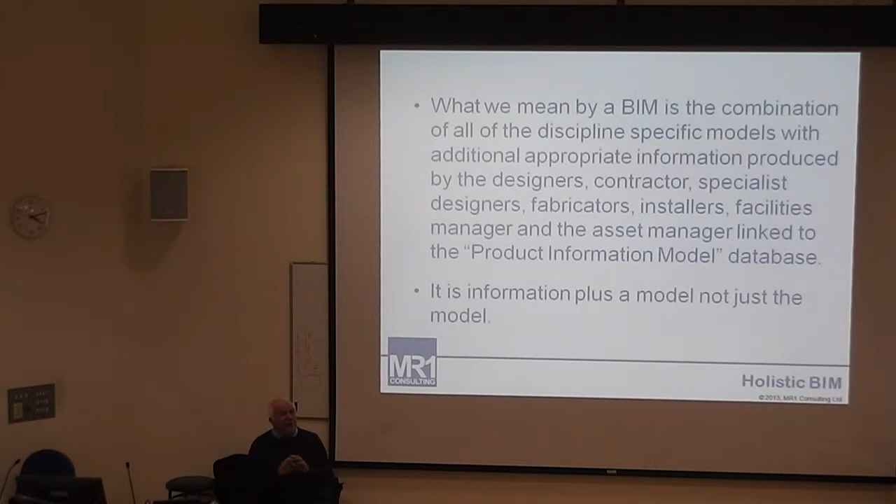If you have it all in one single model, the speed at which you can work, and I have seen people sit there and just click and digitize on the screen and go and get a cup of coffee and come back. You have to manage this process, you have to manage the data, and you have to construct the data in such a way that the tools that you have available to you will work at the optimum speed. And that's what a lot of the stuff I'm going to be talking about leads us towards.

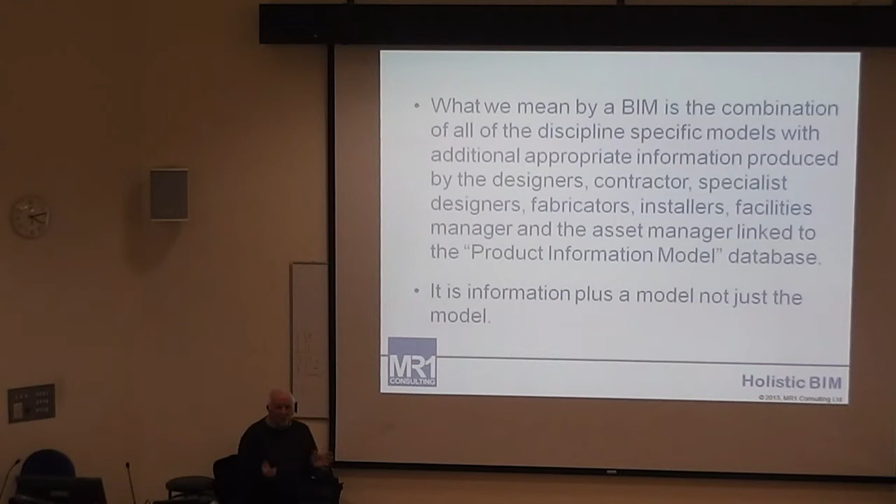Okay, the second biggest problem is an understanding of one of the biggest problems that we've had in construction forever. It really goes back, and the first reference to this is 1905 by the Royal Institution of Chartered Surveyors in one of their annual general meetings, where somebody reported that all information invariably from the architect is inaccurate, incomplete, and ambiguous. And that causes waste.

Waste in construction cost and time overruns, and they are normal, and nothing has changed since 1976 or with the advent of accurate CAD tools. I've actually taken you back to 1905. Between 1905 and 1976, everybody knew this was a problem, but nobody did anything about it. Certainly the two wars, 1914-18 and then the Second World War, the Ministry of Works actually looked and studied this problem of waste, because obviously coming out of the war years, they needed to make sure they built things once and not 1.5 times or 1.3 times, as the case is at the moment.

But because of the tools that they had to work with, they couldn't really do too much until we got to around about 1976. The tools that we were using, I mentioned drawing tools, ink, and we were drawing on linen. This is linen with a wax oil coating. That's pretty hard. Lovely stuff to work with, but you had one big problem, and that is, as you drew the lines in ink, they had to dry. And I'm a lot older than I look.

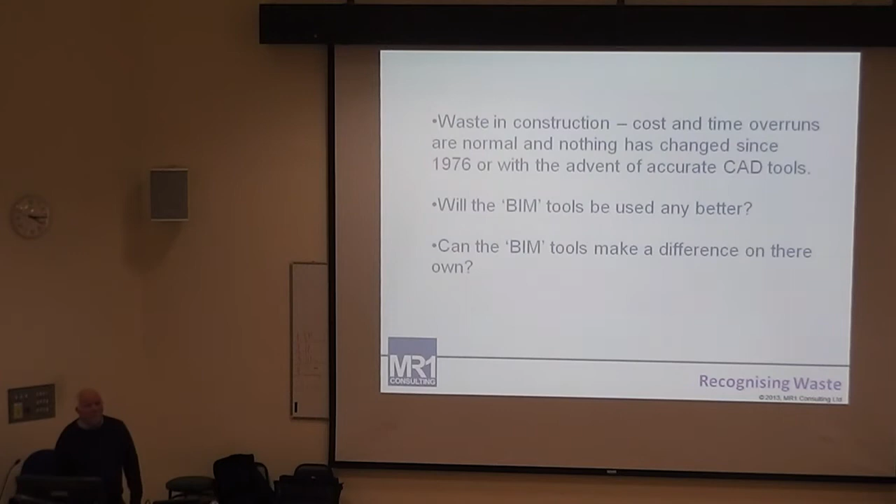So the question now is, can the BIM tools make a difference on their own? And the answer up to now is no. They make no difference whatsoever, because people are still using those tools in the same old processes that they always did, that produced incomplete, inaccurate and ambiguous information.

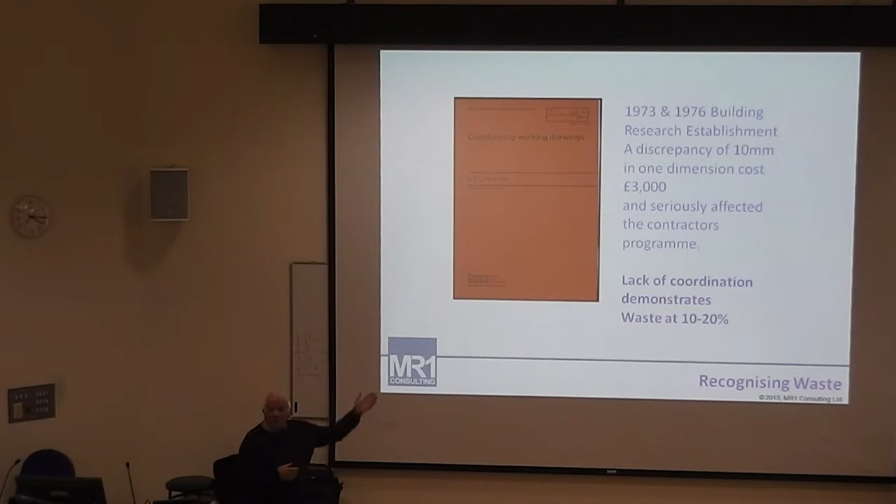1973-76, what really started this whole thing was a report by the BRE. There were two documents produced out at Garston, at their offices in the Building Research Establishment there, where they were putting up 40 buildings post-war, and what they decided to do was to go through the whole process of the design process, fabrication, manufacturing and construction process to see what errors there were and why they occurred. And all of those errors were put together and into these two reports.

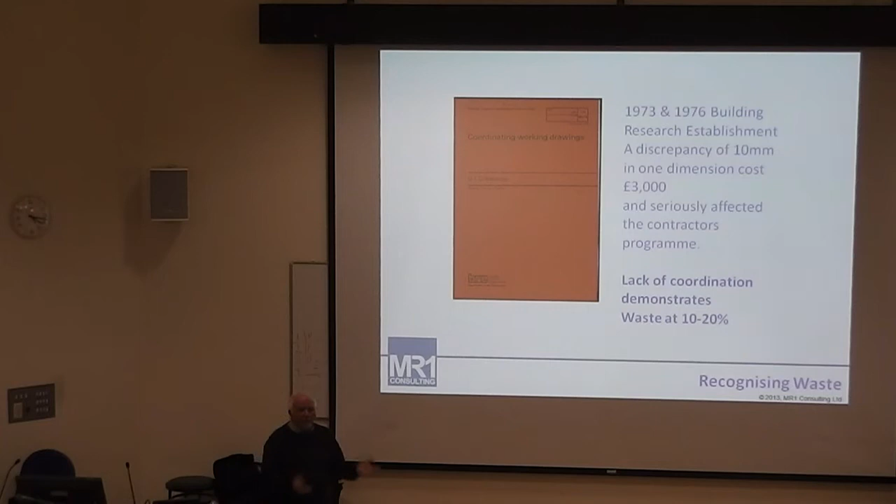The main thrust at that time was spatial coordination of information. What that means is, would things fit when you got onto the building site? And the answer was 25 to 30% of the time they didn't. And so you had to make a change on the site. Ambiguous information then comes into play after that, because everything that's attached to that bit of information is now wrong.

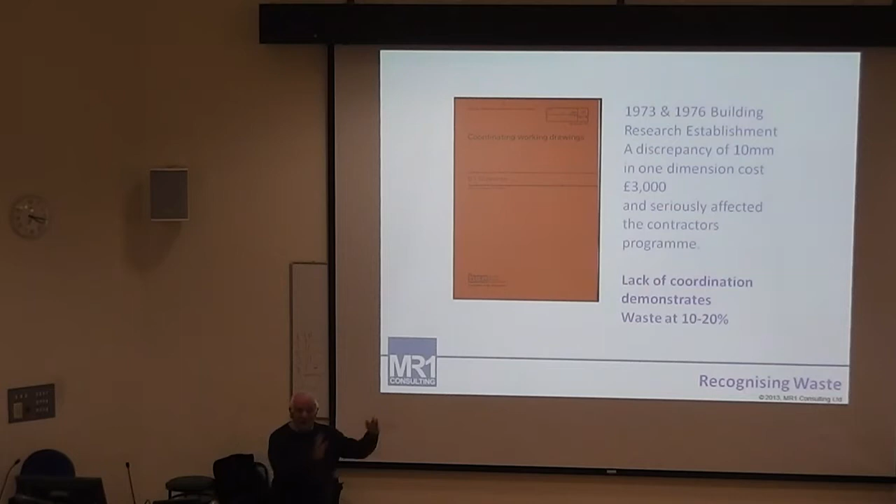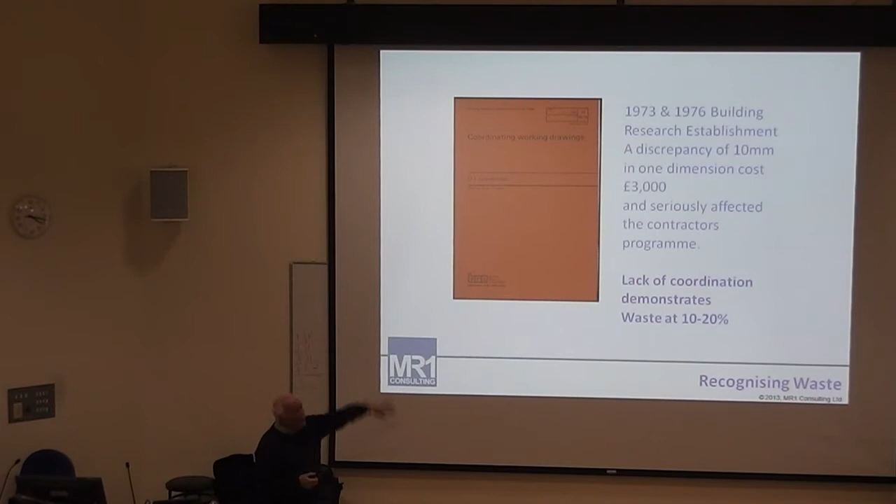The door is not there, it's over there, the window is not there, it's up there, and everything that then relates to that window or that door is also wrong in some way. So these documents actually laid out all of the problems that we were finding continuously being produced.

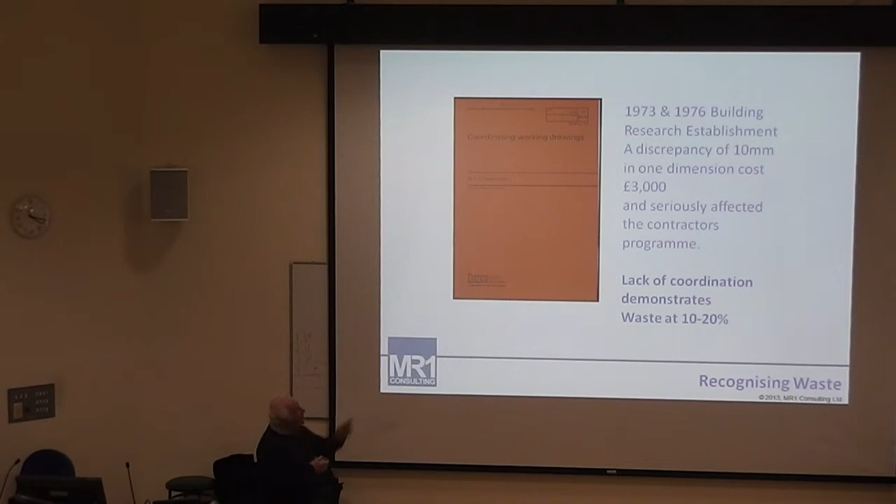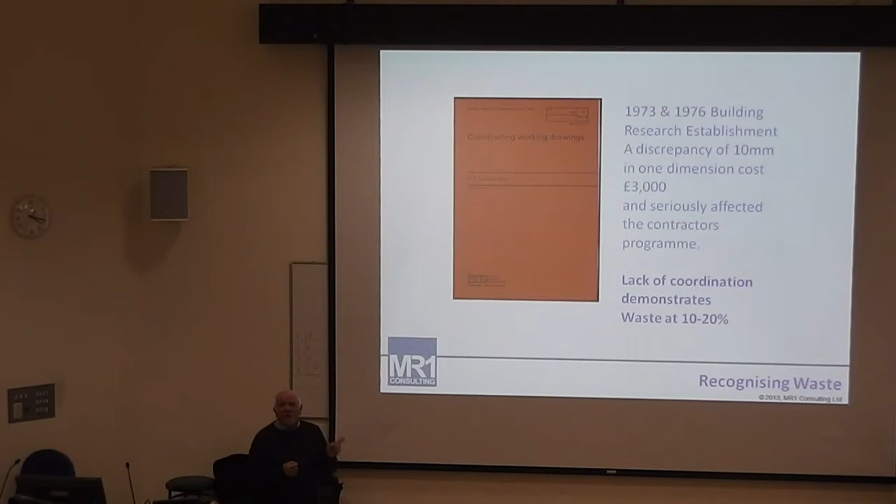The discrepancy of 10 millimetres in one dimension cost on one project £3,000. That's one dimension. You think of all the possibilities, all the dimensions that you have to put on a building to build it, how many times that is going to occur if waste is generated at 20% of the actual cost. So there's £3,000 keep adding up, adding up, adding up.

So this was produced, published, and everybody read it and said, what a great document. Understand that, yeah, it's always been like that. And so what I'm going to do, I'm going to put it safely on this top shelf. And I'm not going to do anything about it.

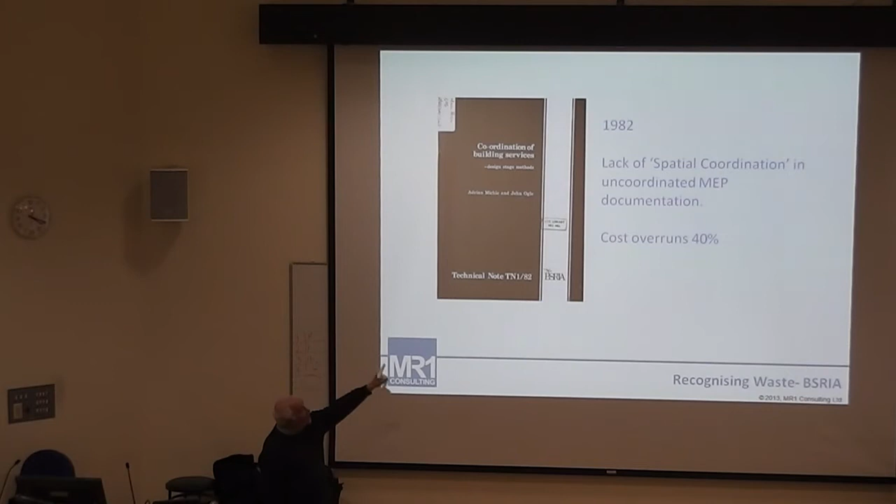1982, BSRIA also did a research into this area to see if things had changed between 1976 and 1982. And the answer was no. Document had gone up there, people had read it, not done anything about it. So now we have even more information coming out in this document. Lack of spatial coordination in uncoordinated MEP documentation produces cost overruns of 40% or more.

I can tell you when this figure was done 10 years later, the amount of time that was measured wasted on site, that is, once people got to site, the amount of time that they were wasting was around about 50% of the time that they were on site, standing around trying to figure out which was the right document, the right drawing to use.

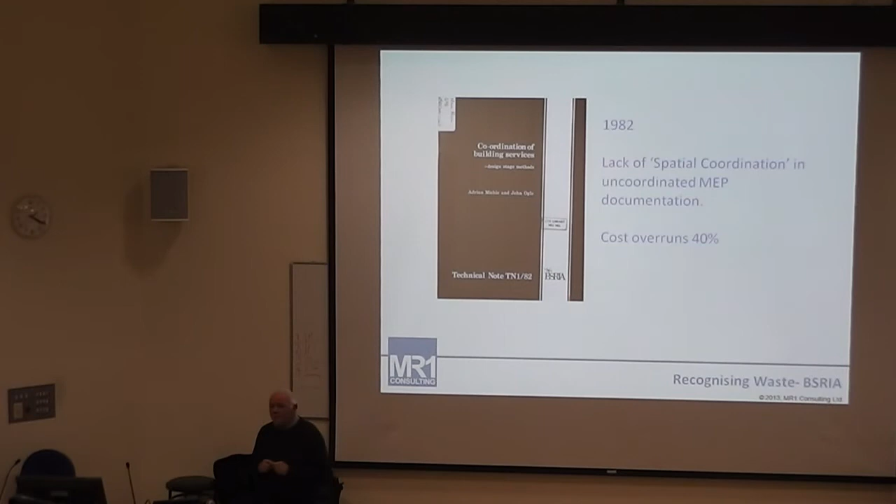The story I'm telling is, even with the use of computers, the problem was getting worse, not better. In fact, a lot of research has demonstrated that whilst most of the industrial use of computers has benefited by about 20 to 25%, cars, aeroplanes, manufacturing, whatever, the construction industry's use of computers is actually 10% negative. We're actually taking longer to do things than we used to. So are these BIM tools that have been sold to us in themselves going to make any difference? And the answer at the moment is, it seems not.

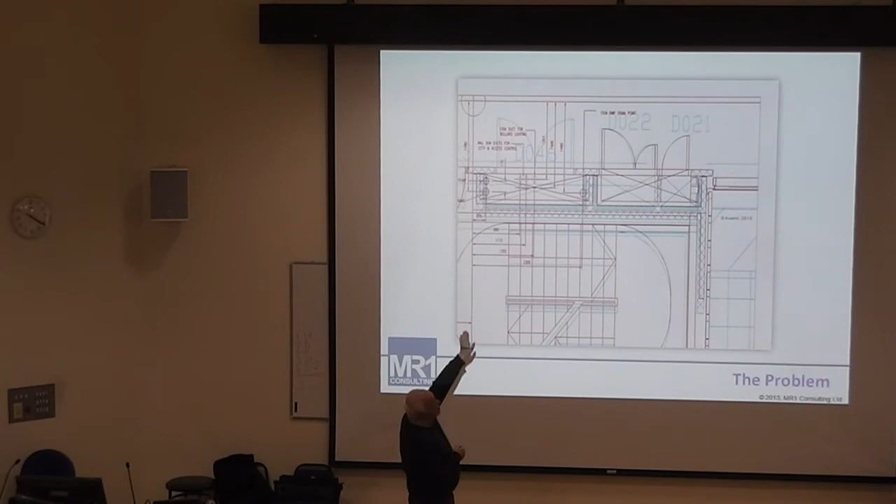So going back to this little thing, information is invariably inaccurate, ambiguous and incomplete. The Coordinated Project Information Committee published this. And they also published this. These are two drawings of a live project. Both of the drawings have been signed off as fit for construction. In other words, somebody has supposedly checked those drawings. One is the architect's drawing, which is the one in blue, and the other is the structural engineer's drawing, which is in red. Now these are CAD drawings.

So why, when we overlay them, do we still see the same problem that we used to see on the construction site when we used to stick two drawings one on top of the other, stick it on the site hut window, wait for the sun to shine, and we could see what the problems were. Here we are with CAD, exactly the same problems were occurring.

Why, can anybody tell me, is the structural engineer redrawing something that the architect has already drawn and can give it to you for nothing in a CAD file? Why are they redrawing it? Because those same old processes and methodologies are so deeply embedded that they continually redraw other people's information because they don't trust it.

This turns up on site. What have we got now? On top of the inaccurate problem, we've now got ambiguity. We're now on the telephone, as the document says, 40% of the time saying, which one do I build it from? That increases the cost of the building by a minimum of 20% and increases the time to deliver by 20%.

The importance about this delay is, in a normal project, let's say somebody just wants something built, let's get it up there, it's an annoyance. I've got to pay more and I didn't get it on time. However, if the project that you're building is actually commoditised in the terms that if I don't get it on time, I cannot earn something with it. So if it's a retail park, shopping mall, whatever, if that isn't up and running 2 weeks before Christmas, I am going to lose a lot of revenue.

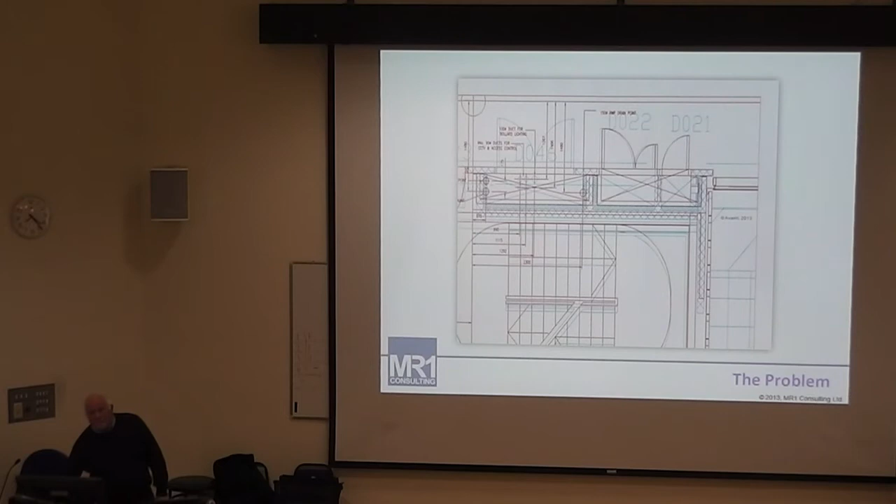Just 2 other little things here, because spatial coordination is one thing. And we see them here in this simple thing, clashes and lack of registration. The architect on this one is in red, and the structural engineer is in blue. Why, when they overlay those two things and they don't fit, why didn't somebody shout? My column, my stanchion is now too big to fit into the structure. Mr. Architect, can I have more space? They didn't. This one, lack of change management. Somebody was not talking to somebody else.

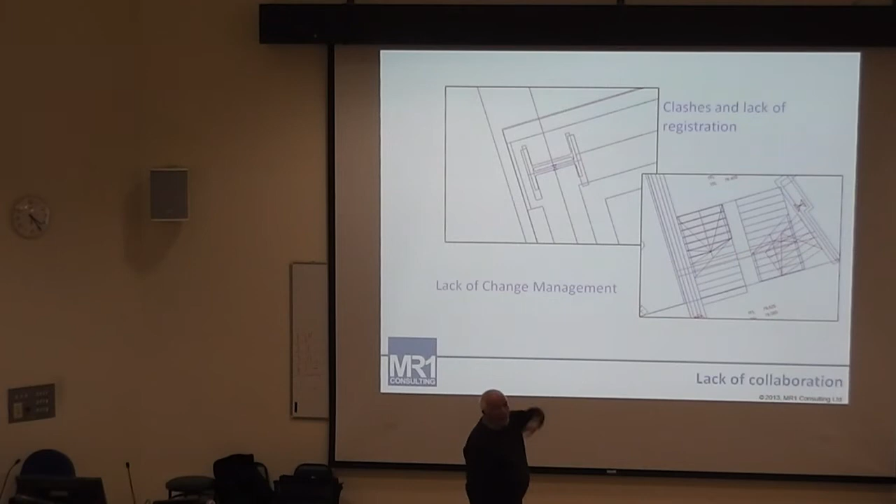What happened here, and this is actually Piccadilly Station in Manchester, the architect designed the 2 staircases as 2 converging flights. The structural engineer, being the simplistic fellow that he is, decides that a much better solution is 2 parallel flights. And when the staircase arrived on site, they couldn't fit it because the edge of the slab had not been prepared to take this change, because they didn't communicate. Nobody told them that somebody had made a unilateral decision.

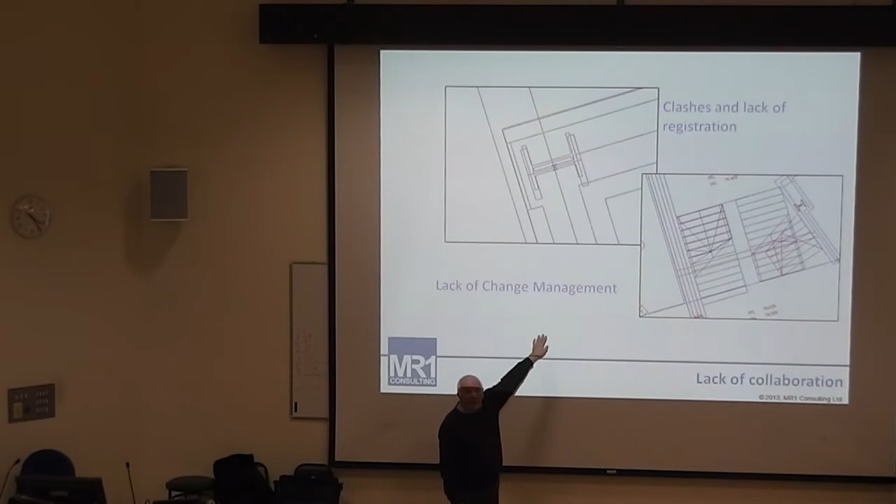Communication, coordination, and all of these things have generated us towards the whole idea that we must become a much more collaborative environment. We must talk to one another. We must work as a team, even though we work in different companies. So process and a culture, sharing, telling, talking, must be generated.

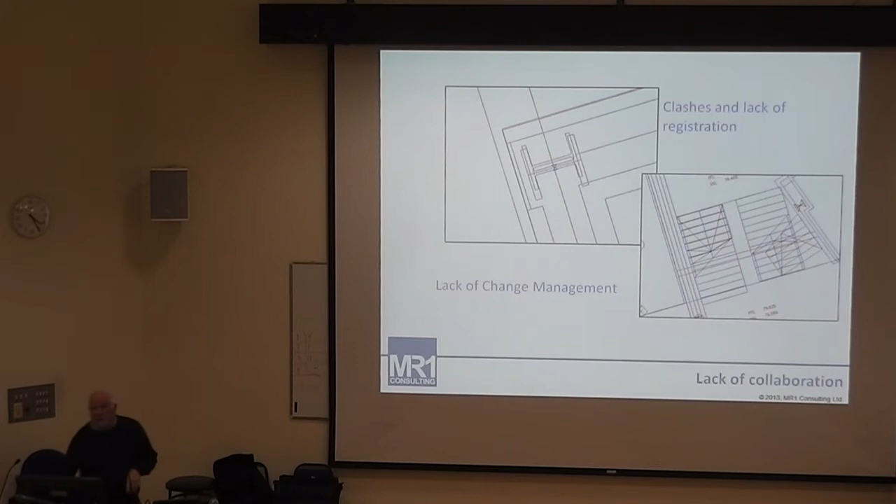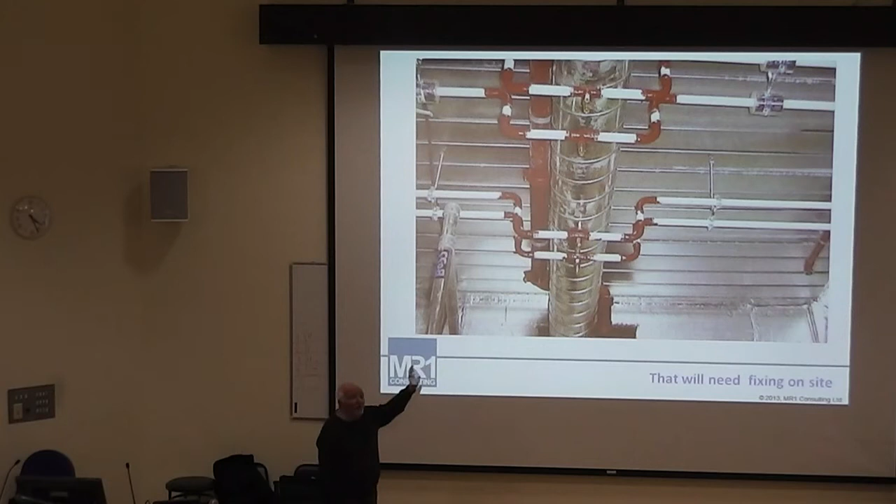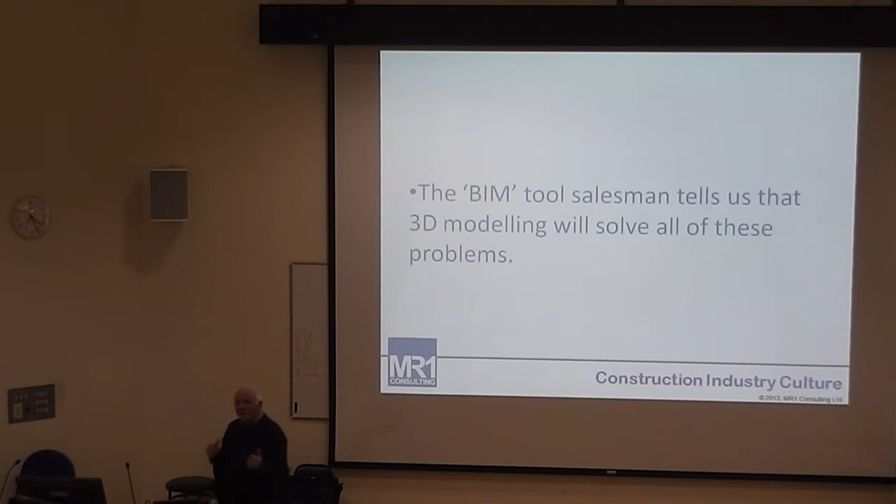And there are thousands of these drawings about. Everybody everywhere I go has got their own. So this is not something new, it has been known, and we see it generated time and time again. So going back to what I said, the BIM tool salesman tells us that 3D modelling will solve all of these problems. It will not.

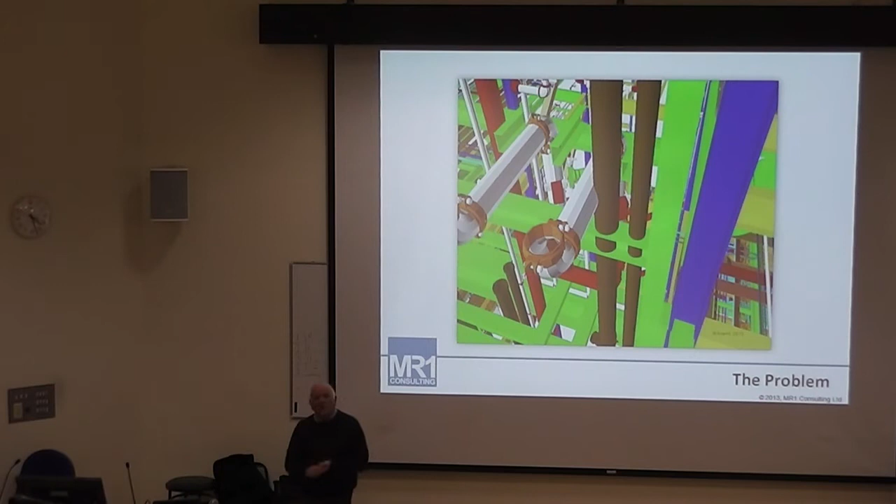Downpipes clashing with the beams and indeed clashing with the MEP's pipework. I could go through this, there's quite a number of these things here. Why is it that the bends are no longer being supported by those two little green stops? Because somebody changed the design partway through and moved from a flanged connection to a clipped connection and didn't bother looking at the effect on the structural fabric that was supporting it. So they lost the supports.

This, the drainage here, is because people just produce their models, do not check their information, just shove it out there for people to use. When you put it together and check it, this is what happens. And out of this, a whole new industry has evolved. It's called clash detection.

All the models on a Friday afternoon are sent to a company somewhere in China, in India, in Brazil these days as well, where they clash the models and then send back a list: 2,500 clashes found in the models this weekend, resolve them on Monday morning. This is not where we want to go, it's not the way we should be working. Without a process, this is what you will continue to get.

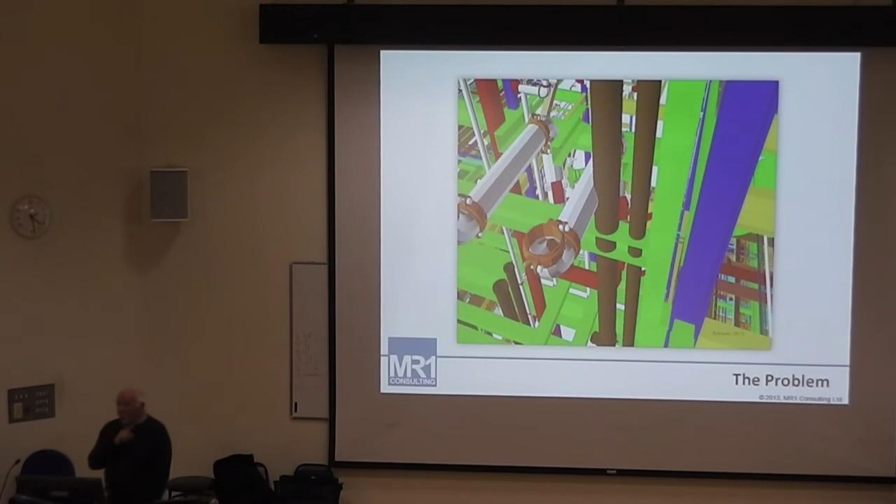What we want is clash avoidance by process, which I'll come back to. Where we've got now is the Latham report, the Egan reports. I don't know if any of you have seen any of these. Once again, we're enforcing what we already knew. The RICS statement, the BRE statements, now picked up by Sir Michael Latham, reporting to the government that he believed that the construction industry, if changed and challenged, could save up to 30%.

The government as client today, 20 years on, is conservative at saying, okay, we'll set the target at 20%. We want you to reduce the waste by 20%. Because the government, the country, is broke. It does not have the money to waste. And so the government as client are no longer willing to pay for the waste that our industry generates.

And why should they? Would you pay 25% for something because the person or company that was producing products for you was rubbish? So why should the government do it on our behalf? So they're now standing up and saying, we no longer are willing to pay for the waste in CapEx. But what we also mean politically is to be able to manage carbon and the waste in operation, in OpEx. So there's a two-tiered activity going on here. Reduce the waste in CapEx, reduce the maintenance costs in OpEx. Back to you guys.

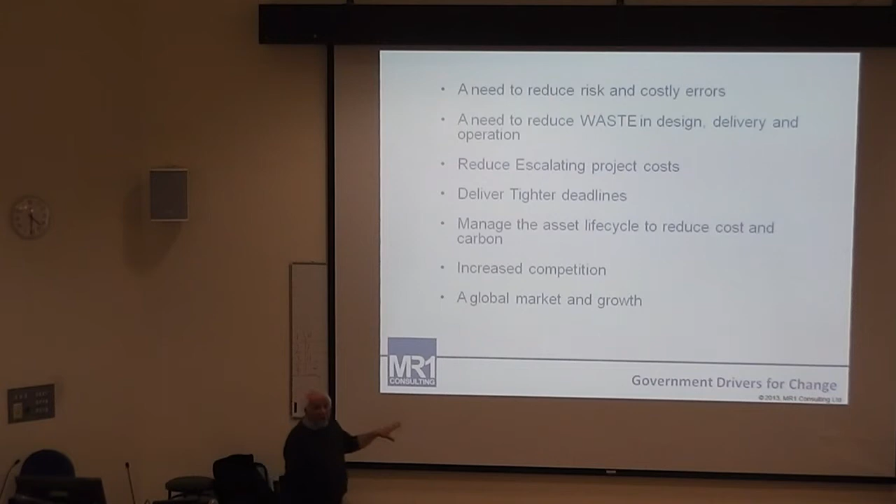These are some of the deeper messages, and it's important to understand them because a lot of people will tell you when this government comes to an end in 2 or 3 years, all of this will be dropped. It won't. Because we have an underlying need to continue this and to deliver good quality information into OpEx and to reduce cost. In fact, the UK is now seen to be the leaders in the use of BIM as a holistic process, not just in using CAD tools. We've moved right up to the top. We are now seen to be the leaders in the way we are implementing this.

To such a degree that Germany, last month, has actually also taken up the idea of mandating these processes. The first Norwegian organisation actually passed their BIM tests at some lectures and educational processes that the BRE are doing. So Norway really wants to do it as well.

I'm working in the Far East, in Malaysia, and it's also been looked at in the rebuilding of Christchurch, with the New Zealand company, after the destruction that went on there. So this thing has now gone global, and that means we can export our knowledge and our capabilities. It's jobs. Out there, it's work that we can do much better, much faster than others. It is about growth.

So, as I said, we keep doing the same old thing, using different types of tools forever, and as Einstein says, madness is to continually do the same thing in the hope that the outcome will somehow be different. It won't. A lot of the tools that we've got in the marketplace have actually been built on the old processes, the old methodologies. It's an electronic drawing board in 2D or 3D using the same old methodologies that you always did. We have to change completely, and that's what the government thrust is all about.

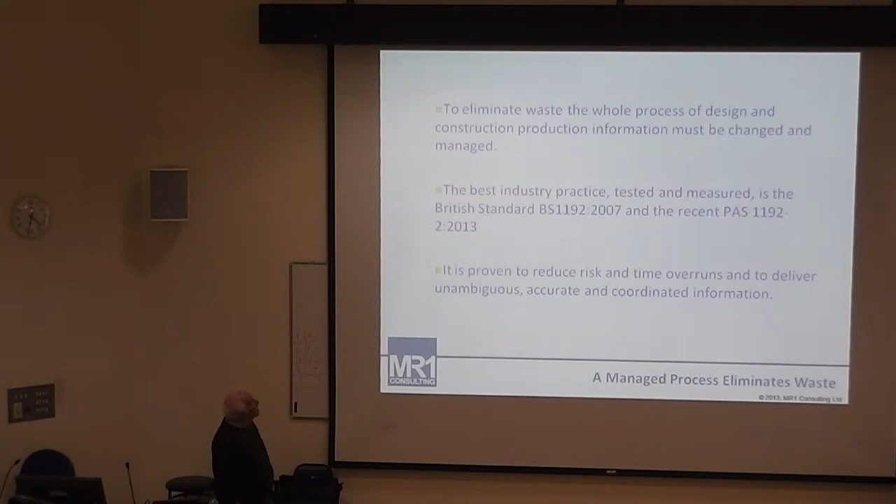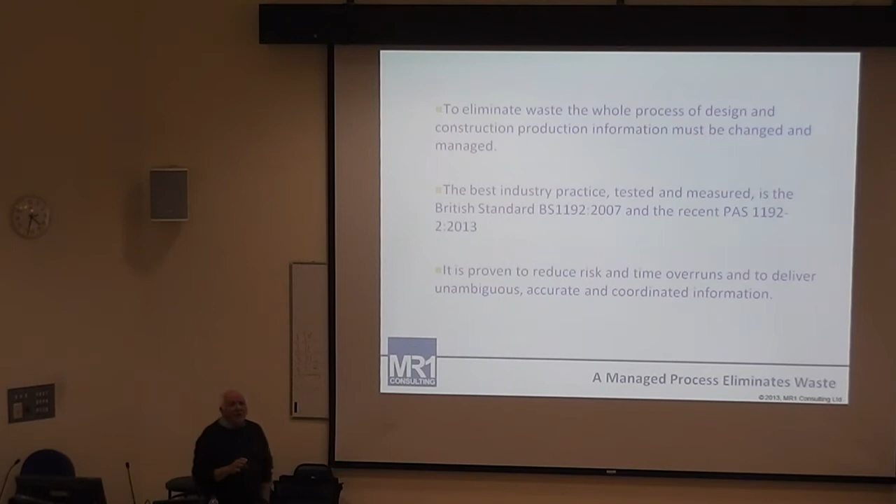So to eliminate waste in the whole process of design, construction, production information, we must change and we must manage what we're doing. Best industry practice must be used. BS 1192:2007 is the only method that has been tried and tested and measured to actually save money and time.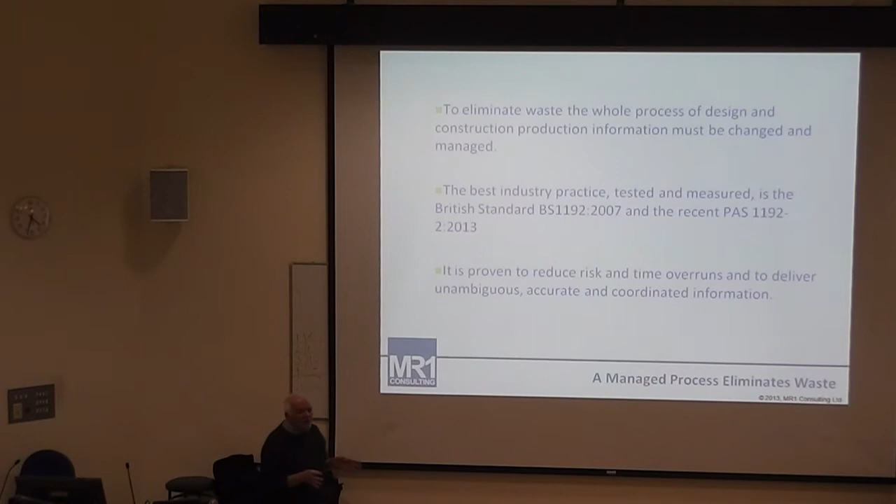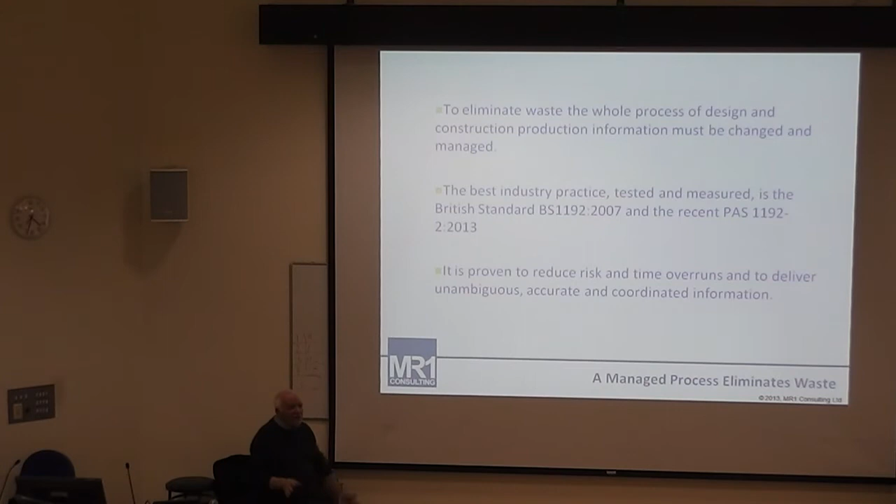It was actually born out of a thing called the Avanti programme, where the government decided it had spent far too much money on research in the construction industry, and everything that had been produced had been put up on the top shelf. So in 2004, they put out some money to say, if somebody would please take all of the documents off the top shelf and apply them in a project and tell us that they really do work and measure the outcomes, we will give you some money to do this.

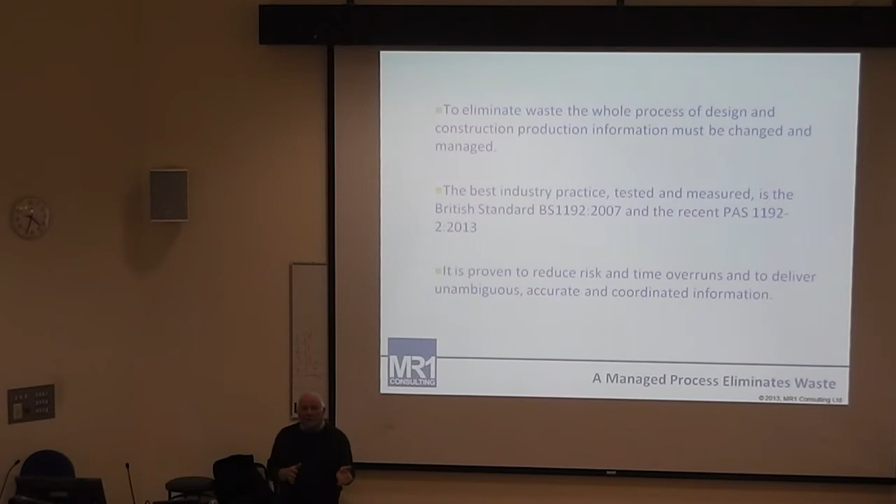And they spent £1 million on quite a number of projects putting these processes in place, and every single one of those projects saved money. A minimum of 10%, 50% of what the government is now asking for. And those processes were taken up by the BSI, the British Standards, and produced as BS 1192-2007. That has now been expanded to a PAS 1192 Part 2, 2013.

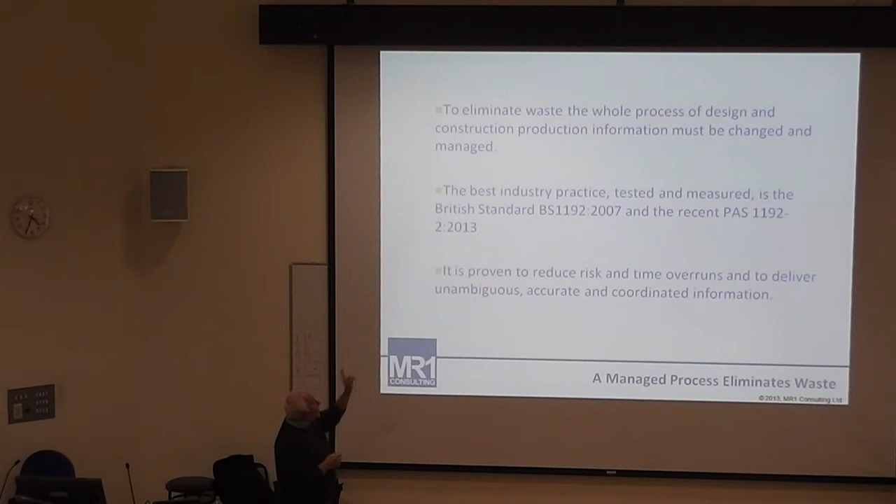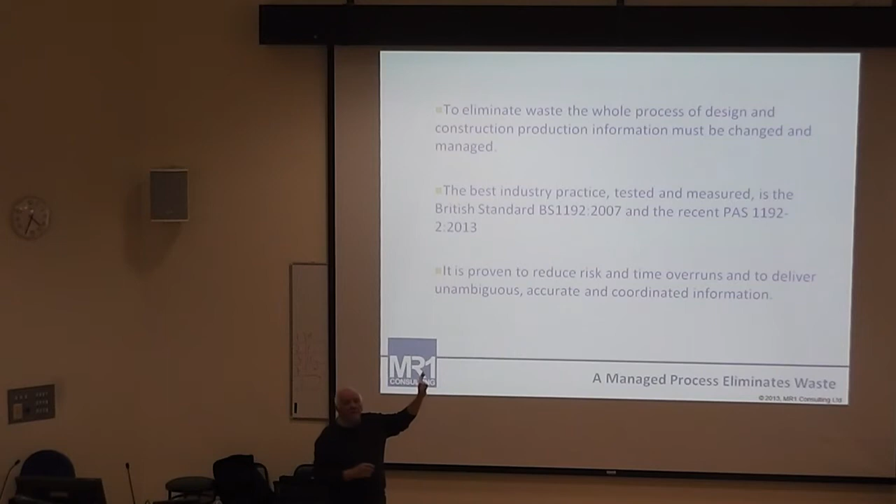Very quickly, a BS is best practice. It's reportage in a way that somebody has written down what the industry is doing, and it has been proven to be right, and it is measured to be correct. It becomes a British standard. A PAS is a privately available specification, or a publicly available specification. What this means is, here is a specification we suggest you use, and we can then measure it to see whether it actually works and saves time.

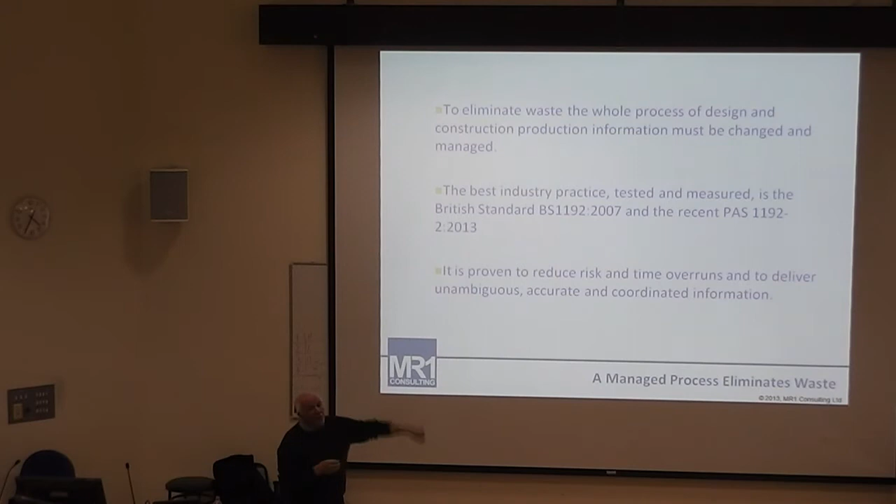You have to have it in use for 12 months, then we can rewrite it, and it will become the PAS 1192, BS 1192 Part 2. So it is on the journey to being a BS. The BS 1192-2007 has already been taken up in Europe and will be moved to an ISO, an international standard, during the next 12 months. So what we're doing in the UK is going out there worldwide, certainly into nearer Europe.

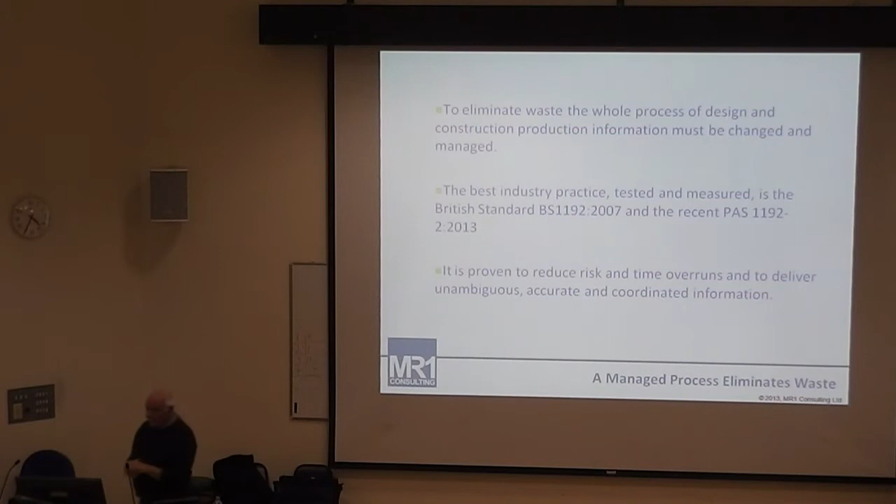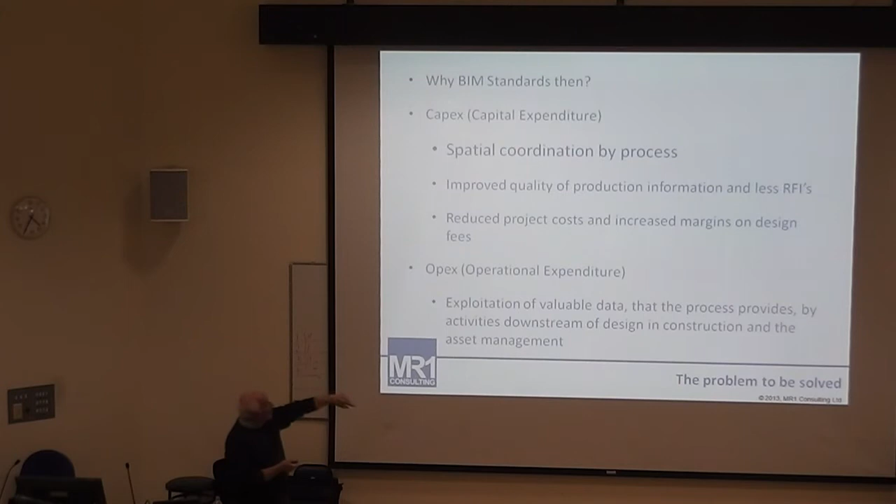BIM standards. As I said, what we're trying to do is to get into capital expenditure, spatial coordination by process, improve quality of production information and less RFIs, reduce project costs, etc. And in OPEX, the exploitation of valuable data that the process provides to be used by the activities downstream. And that means asset management and facilities management. The more accurate information you've got to play with, the more decisions and the better decisions you will make on behalf of that project, that building, in maintenance and asset use through its life cycle.

Sorry, it's my phone. I was going to say, is that somebody's phone? It's mine.

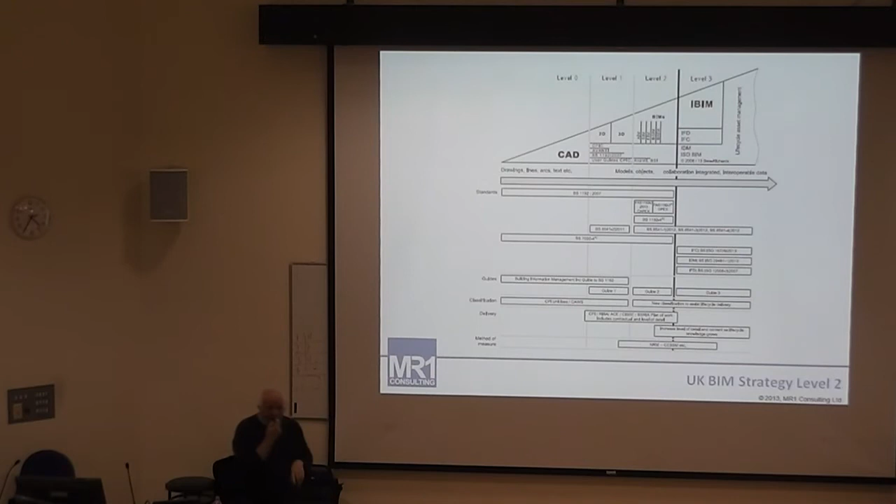Where we've come from, and this diagram is quite interesting. This is the diagram, known as the wedgie, that government picked up and has decided to go with. And it's become quite iconic around the world. What it actually shows is the progress of CAD, the technologies in trying to overcome this problem, when it was just CAD, computer-aided drafting, moved into 2D, 3D, because that was all that was being done at that time. So at level 1, not much difference than we were doing in 2D.

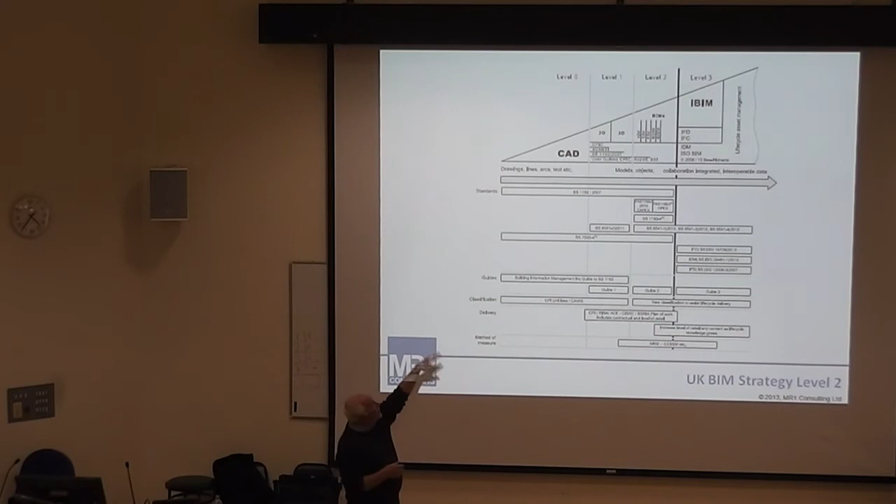And now we're moving to level 2, which is where we want to go, where these processes must be used and embedded, and the software needs to change to allow us to do better things. So the vendors have also got to come on board. At the moment, those little vertical silos represent the architectural information model, the structural information model, the facilities information model, etc. And the one at the end, which I really love, is BRIM, because we also have a bridge information model. So you can have any type of information model you want. It doesn't really matter. The fact that they're standing vertical says that they cannot talk to one another.

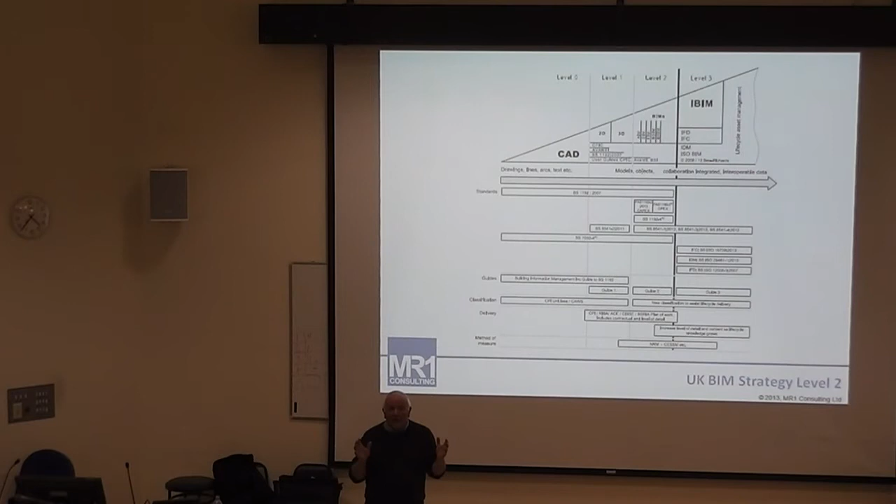Interoperability between products is so bad that we can't actually share our information freely. So what you end up doing is either having a project where everybody uses the same software, or you find some other way of sharing your information and using the processes of overlaying and reusing. What we need the industry to do is to give us better software, different software to what we've got.

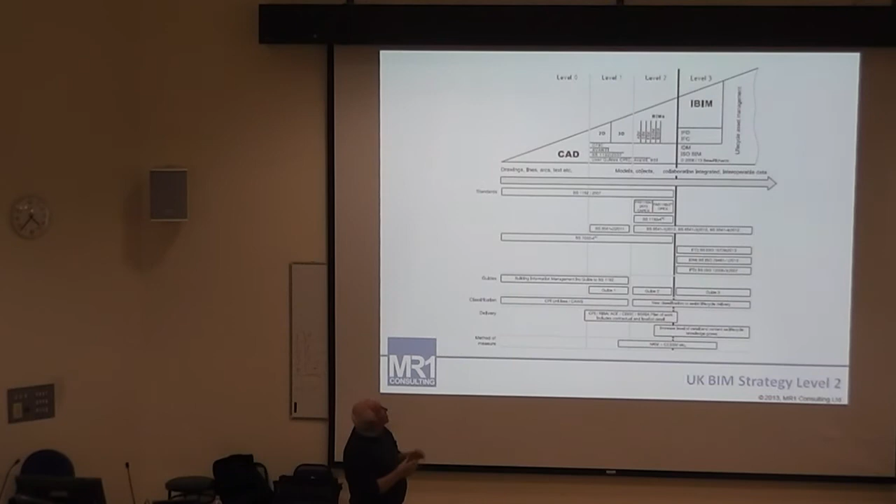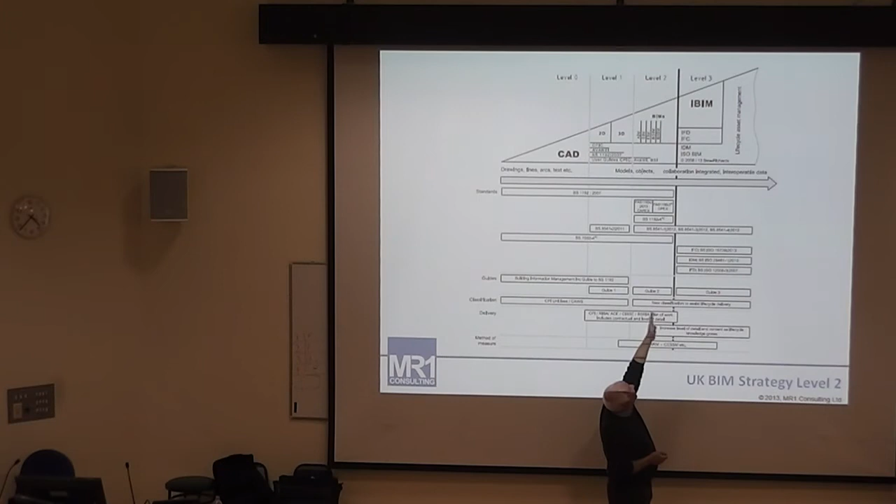We also have a whole series of standards, the CPI stuff, Avanti, which I mentioned earlier, BS 1192, PAS 1192, PAS 1192 3 and 4 is also just being written, etc. And these are the documents that are being produced by the BRE, by the BSI, CPIC and CIC up to this point here, which is what the government is asking for, the delivery of BIM up to level 2.

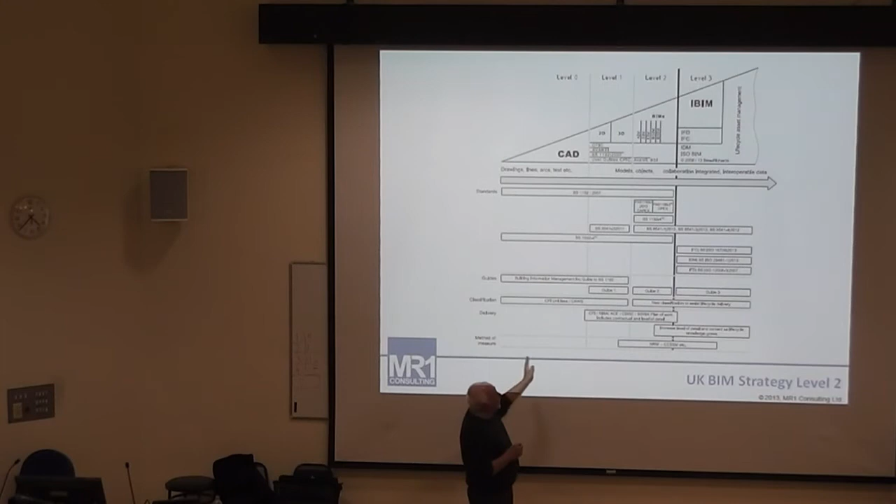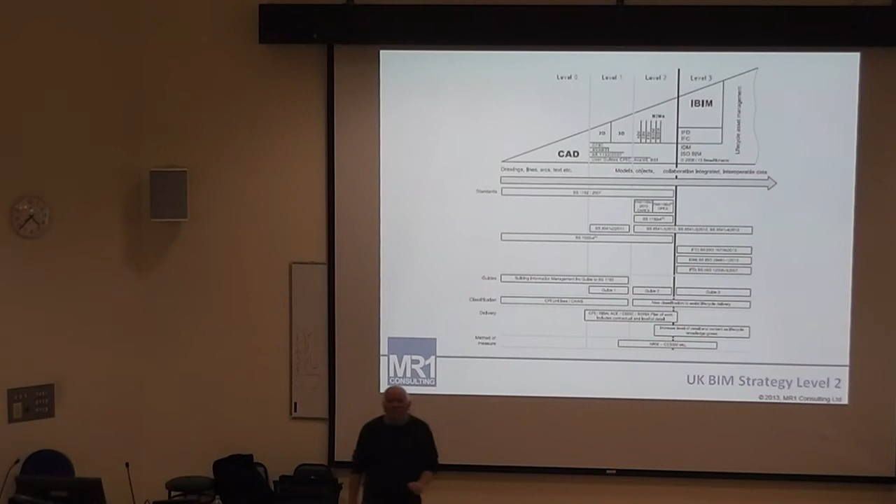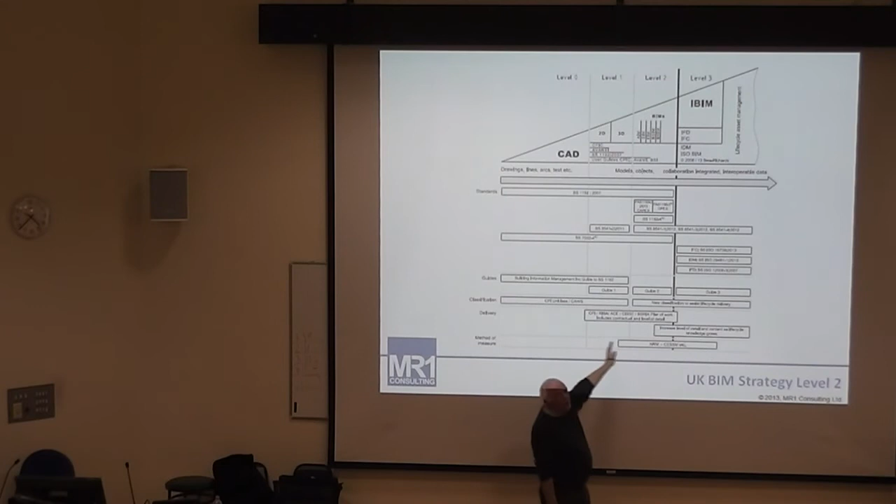The reason for showing you this is that everybody who wants to market themselves, the same as the vendors are marketing themselves, are out there telling everybody, do you know what? I'm at level 3. Nobody can actually achieve level 2 at the moment, for a very simple reason, and that is we haven't completed all of the documents, and they will not be completed until next Easter. So there is a journey that everybody should be on, and everybody is in the same space, and everybody is moving along at the same pace.

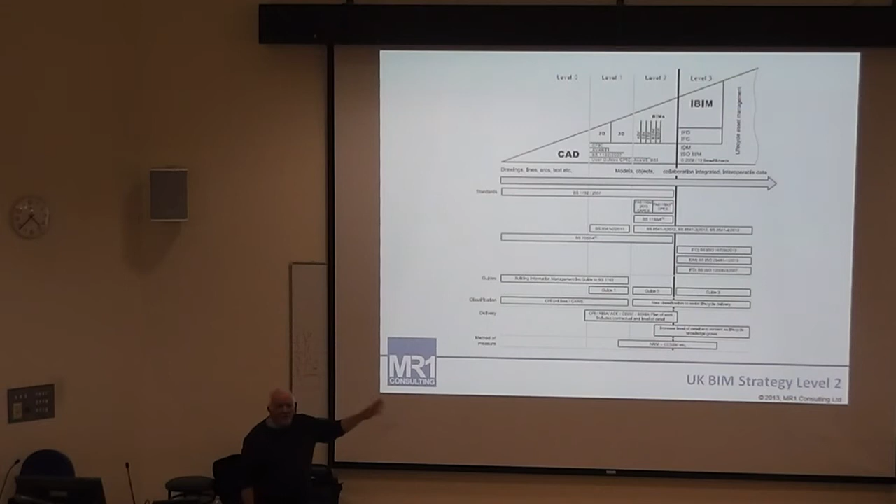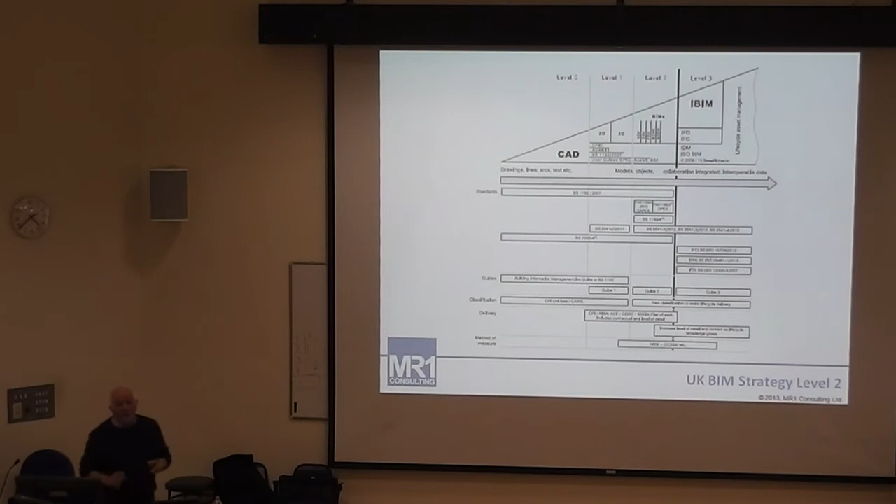So anybody who tells you, I'm doing level 2 or I'm doing level 3, to differentiate themselves in the marketplace is wrong. They are just kidding themselves and others. That level 2 is what the government has asked us to do. So PAS 1192 extends BS 1192-2007. It's a bit meaningless at the moment, and I will come to it in a moment. It defines the method and the documentation required to define level compliance, and the process is equally usable.

And this is where we get into big problems in our industry, that the builders, the vertical, and the flatlanders, the infrastructure, start arguing with one another that for some reason or other what they're doing is different from something else. This is all about construction. It doesn't matter whether you're going up or whether you're going along. These processes work everywhere. BS 1192-2007 was actually developed on rail projects and then upgraded to work with buildings. So the argument out there is this works for both environments. It's all the same process.

The 7 documents that you require to get to level 2 are CIC BIM protocol, which is the legal and contractual conditions that need to be set to allow people to work together properly. And there are big problems. People say, I can't work with you because I am not going to let you have a copy of my information because you might change it. I don't quite understand this. Because one of the first things we were taught when we were printing paper was actually how to cut out the corner of a drawing sheet and superimpose our own drawing sheets in there with a bit of sellotape and then reprint it. We were stealing information from one another all that time ago.

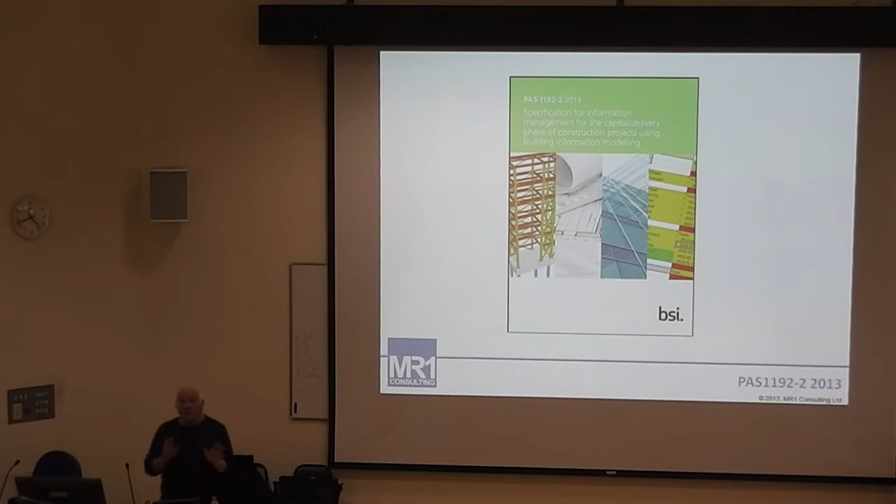Is that, yeah, okay. So no excuses. If you want to find out what's going on and how to do this, then those documents are there to be used. The main purpose of the PAS is to ensure that the employer and those tendering for projects fully understand the needs of that project, no surprises.

One of the things that comes in the tendering process is everybody tries to be clever in seeing something where they can make money. And so everybody that's tendering usually finds something slightly different, and then you get different prices coming in, whatever. When they win the job, what they do is they then try to make claims for any changes that are coming about. This also accelerates the cost.

So this process is being set up right from the beginning, that the employer has a responsibility to make sure that the brief is as complete as it can be. Everybody is acting upon the same information. Everybody answers the same questions, so it is a level playing field, and there will be no surprises once the project starts. There will be no things that have been left out.

A change in the government as client having now to become an expert, which he wasn't before. So not only has industry got to change, the government as client is also changing. There are teams of people in government, in the Cabinet Office and in with the ministries that are now educating the client to understand what their responsibilities are in making sure that they put out much, much better specifications and tendering information to the industry. And it's known as the Employer's Information Requirement. And it is a document that's necessary under PAS 1192.

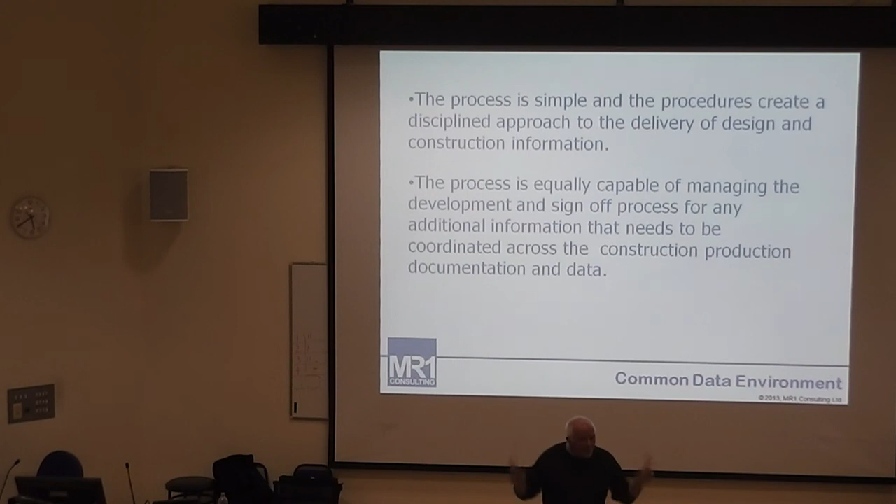The NEC contracts are being looked at again. There is a greater understanding coming about now of this whole thing, the holistic BIM that I've been talking about, not what vendors are talking about, this holistic process that the government's asking for. And the NEC contracts are being changed to cater for that. The BIM protocol also helps in the way in which those contracts are going to be set up. So they will come out, and the JCT contracts and the collaborative working contracts, they're all learning at the moment, and there's still adjustments to be made to those contracts.

If we push the industry a bit too fast, then we may have a kickback. But all of these things must all go together in parallel. We are all learning. Quickly at the moment, but we are learning. It's not a done deal. We've still got a way to go. We need to understand it, and we need to collaborate in what we're doing there. Which is why lots of people, and your own colleagues here, are involved in helping move this stuff forward. It's the biggest research activity that's ever been carried out, to be honest. But it's worthwhile at the end of the day.

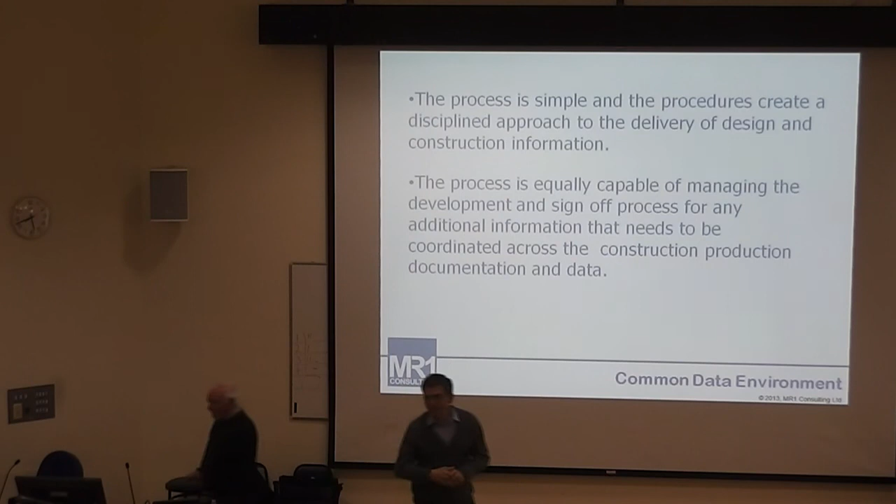For those of you that are in management, if you want some feedback on your performances that you put in, you best stay. I'll let you shut down. So just hang on a few minutes. Obviously, there's some people in here who don't want feedback on that. So, Richard, just wait a couple of seconds. I'll just stop that and I'll give you some generic feedback.

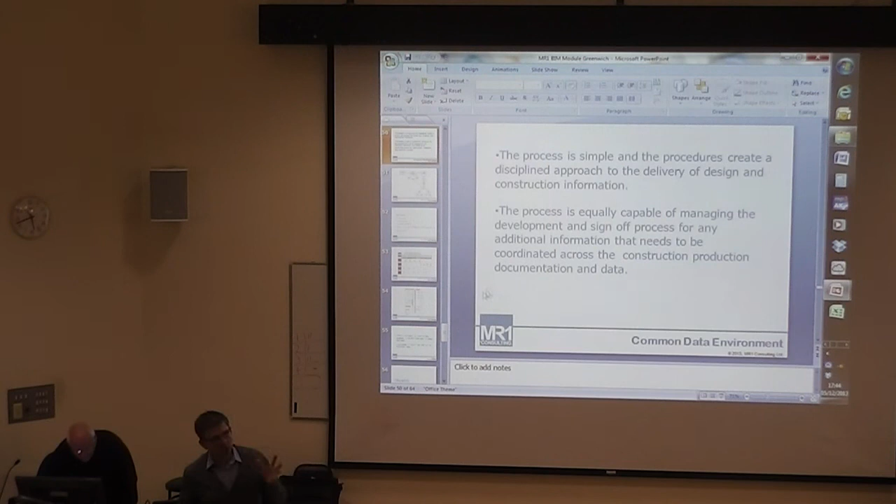I've looked at about a quarter of them now already since you handed them in. So I'll give you some pointers on what's wrong with risk registers that I've seen so far, and what you might need to change to get a better mark for your summative. So this is your last opportunity, particularly part-timers, to see